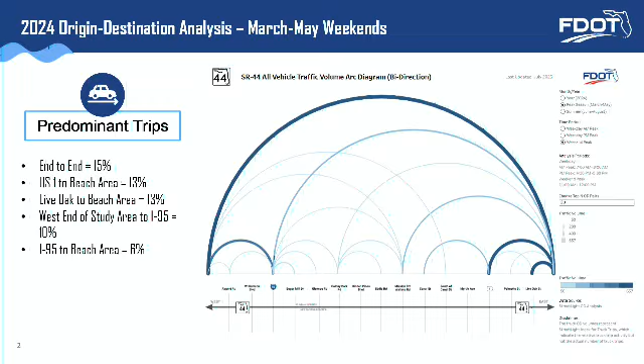Along with that, we even went one step further and did what we call an origin-destination analysis. We wanted to know where people were coming from in order to get to New Smyrna on State Road 44. This is a very large graph, but I'll click to the next slide to summarize what we found: approximately 34% of weekend trips originate from Osceola, Orange, or Seminole counties.

Looking at that, one of the first ideas we had, and it'll be a theme with all of these ideas, is that as a state, we have limited resources, so we're trying to do more with less at all points in time. Keeping that in mind, we tried to keep all these ideas to things that don't require right-of-way, don't require 2-3 year studies to then go into a right-of-way phase for another 2 years, then go into design and take 7-8 years.

We're trying to use the resources that we have to make high impactful changes without having to take a long time in order to get there.

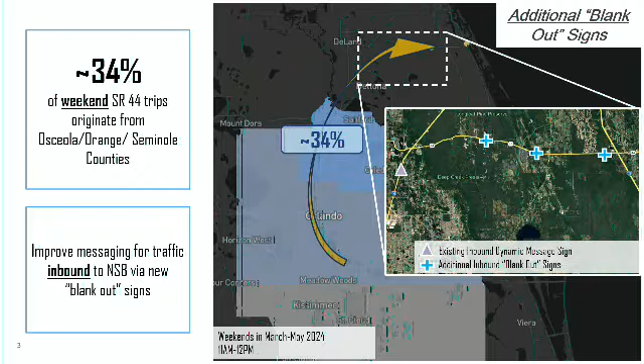One of those ideas was improved messaging for traffic inbound to New Smyrna Beach via blank out signs along State Road 44. At the I-95 northbound off-ramp, we've introduced beach closed or beach full, parking full signs at the end of that off-ramp. The idea is expanding that out with whatever messaging would need to be displayed for weekends via blank out signs, since a large portion of traffic is coming up the I-4 corridor. There's also an existing DMS sign on I-4 itself that we could potentially use to communicate messaging about New Smyrna Beach.

Going into more conventional solutions, we looked at the Mission, Wallace, and State Road 44 intersection. This intersection is heavily congested and is definitely a pinch point along the corridor. Analyzing the Wallace Road side, the northern side of the intersection, we realized there was enough existing pavement to restripe and allow 2 through lanes in addition to a dedicated left turn lane. That allows us to provide 2 through lanes on the south side as well.

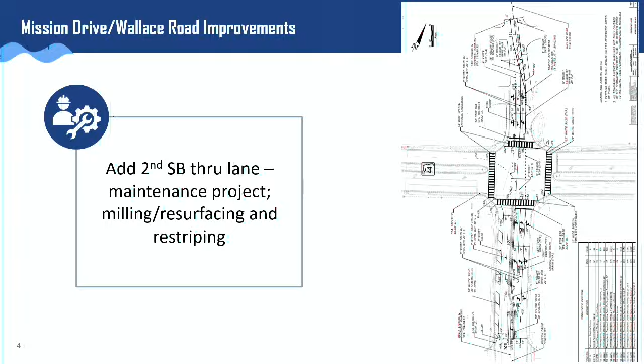Anytime we come to a signalized intersection, we care about green time—how much green time do we have to process traffic. This gives us a way to optimize that green time in order to clear traffic. So this is not only going to help Mission Wallace, it's also going to help State Road 44, because we're able to clear traffic quicker on Wallace going over to Mission in the southbound direction, which provides more green time to State Road 44.

Just so y'all know, this one is truly a restripe—an extremely quick fix, low cost. We even talked to our maintenance folks, and they could go out there and do something like this, provided we had consensus and approvals within the next couple of months. It's a very low cost but high return when we look at the operations and capacity of that intersection.

If we go one step further—this is the same image, but that other image is a plan view because we went ahead and did plans for it since it's relatively simplistic. The orange on Wallace Road is the additional lane we would be adding. If we also add a dedicated right turn lane on 44, that's the orange colored right turn lane there, those two operational improvements combined give about 50% additional capacity to this intersection alone. It's a huge return on investment to get a huge amount of capacity added to this particular intersection.

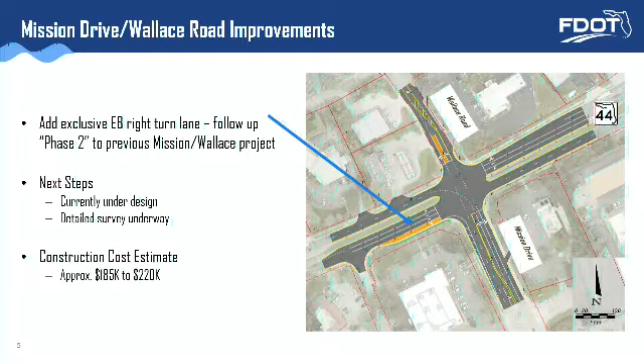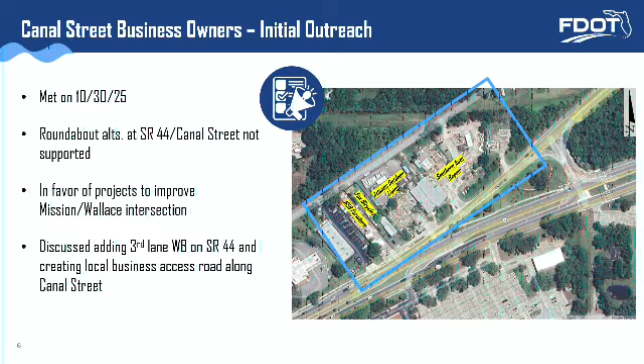The next intersection we looked at is the Canal Street intersection at State Road 44. I know the department looked at this some years ago, so we talked to the folks who were involved at the department level about some of the issues there. We took some of those concepts and some new concepts out to the business owners we've put in a square blue box here, to get a feel for their concerns and the options we thought we had on the table. After talking with them about their concerns and looking at the traffic analysis, what we came up with was that we don't actually need what I'll call a slip lane or bypass lane.

If we're able to redirect traffic up to the signal at Canal and State Road 44, there's a lot of operational benefits to State Road 44 without impacting Canal Street significantly. Some of that is redistribution of green time at the signalized intersection, but it still provides access to all those businesses without creating friction on the roadway system. I'm not here to speak for those businesses, but we have spoken to them, and from a conceptual level they thought this would be acceptable and not impede their operations.

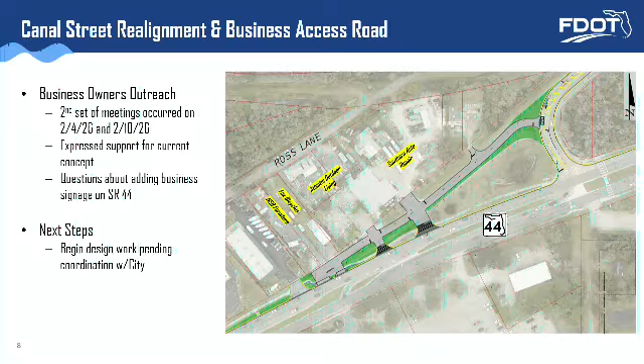We have approximate construction prices. This is a planning level estimate since it's conceptual, but really it's not a lot of work. It's mostly pavement removal, increasing driveways, and restriping the road that's already there to make it a driveway. So it's fairly easy and straightforward to incorporate into a project. We had two sets of meetings with the business owners on that.

Another small improvement we looked at was the Colony Park Road intersection, doing some conversion of existing lanes and moving some signal heads. Again, small resource needed, heavy return on the amount of throughput.

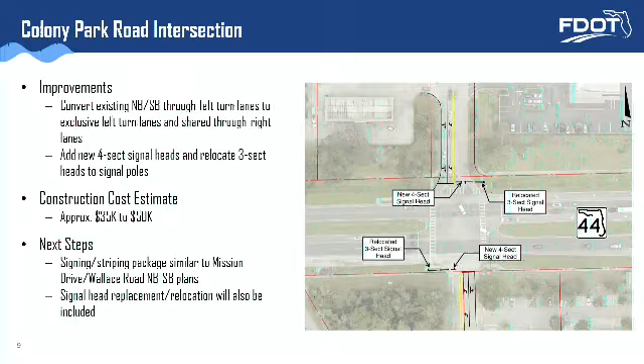I don't have a slide on it, but at the Corbin Park intersection there has been a signal warrant analysis done, and a signal is warranted at that location. We're trying to figure out how to put it in without purchasing right of way, because as soon as you trip that right-of-way phase, you go from a year to potentially 7 years, depending on how much right of way you're taking and what exactly you're impacting. So we're continuing to work on how to fit a signal in there within the existing right of way. We know it's warranted, we know we can build it, but how do we do it today without waiting to purchase that right of way? I believe we've made some progress on that, but it wasn't incorporated into this presentation.

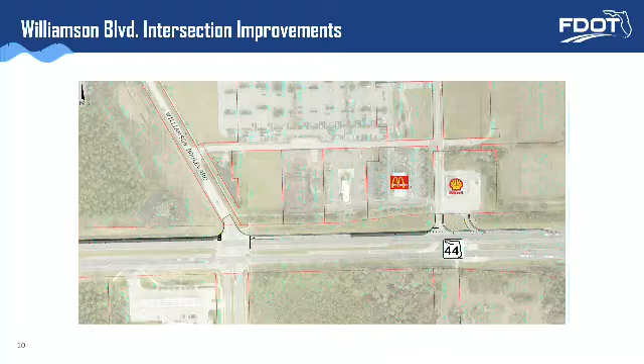If we do that in combination with adding a second southbound right turn lane here at the off-ramp, that would have to be signalized. But if we do those two things in conjunction and then sequence-connect the two signalized intersections to make them work together in harmony, we see a lot of operational benefits for State Road 44 and the I-95 interchange from that perspective.

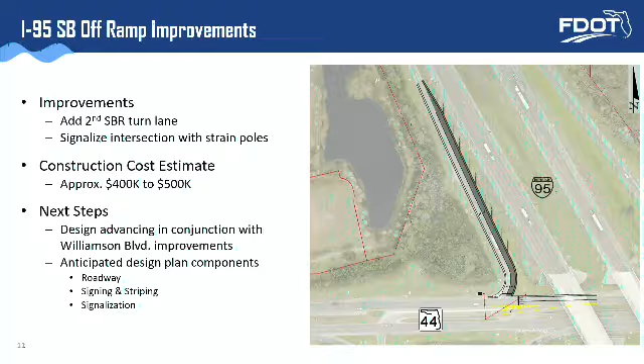So I know I went through that pretty quick. I wanted to provide time for questions or any discussion.

Perfect, thank you so much. My colleagues have got questions.

Yes, Vice Mayor. Thank you very much for coming out tonight and presenting this. This is something everybody in the community is excited about, and has been waiting a long time for. Appreciate your enthusiasm and trying to get something done as soon as you can. I understand once you get into right-of-ways how long everything takes, and it just gets dragged down to the mud.

The intersection, Mission, 44, Wallace. The key there is right turn lanes. I love what you've done. The only thing missing, I think, what I would love to see on Mission Road, is a right turn lane heading north on Mission coming up to 44.

That intersection is a feeder from Edgewater, the high school, and the post office, a very busy intersection. The double left turn lane is already backing up past the turn lanes, but with the straight lane mixed with a right turn lane, you'll sit through that light a couple turns usually. That's a super important one. I know it's a difficult intersection. I don't know if there's some way you can squeeze a right turn lane into that, but that would be fantastic. I love what you're doing.